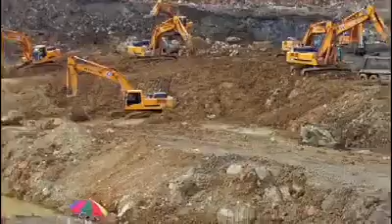But the Subic shipyard didn't have such an easy start. What made this project possible, despite such difficulties, was Hhic Phil's enthusiasm, which turned crises into opportunities.

Starting in May 2006, Hhic Phil completed the construction of a mega-scale shipyard on 304 hectares of land in merely 35 months. Prior to construction of the shipyard, Hhic Phil also won the bid for 12 container ships, writing a new chapter in the history of global shipbuilding.

Hhic Phil was also awarded a presidential award by the President of the Philippines in July 2008, the first time for Asia.

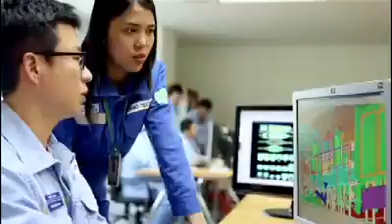The Subic shipyard serves as a mechanism for maximizing synergy in economic development for both Korea and the Philippines. It helped the Philippines become the fourth biggest shipbuilding country in the world, and it has contributed to creating over 20,000 new jobs, becoming a role model for our mutual growth.

The layout of the shipyard and production system, built according to a thorough design plan, is creating a new paradigm in the design of efficient global shipyards.

The world's largest dock, number 6, is 7 times the size of a soccer field and has a capacity of 450,000 tons per year. Dock number 5 also has a capacity of 250,000 tons. In addition, there is a 3.8-kilometer long quay as well as 4 giant Goliath cranes. It is a global-scale shipyard.

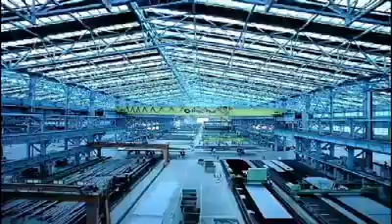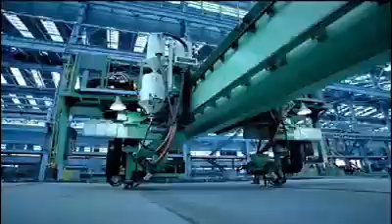The pre-treatment and cutting shop are arranged into 4 buildings and boasts state-of-the-art equipment including 21 plasma cutting machines and a 2,200-ton roll press. It has the capacity for pre-treatment and cutting of 500,000 tons annually.

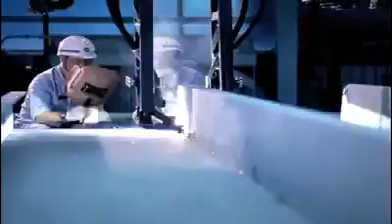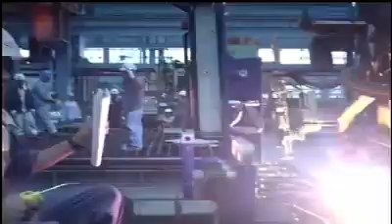At the 175,000 square meter assembly shop, individual blocks of the ship are manufactured in its own specific assembly shop. Then the blocks that span over 1,000 meters are welded together in merely 40 minutes using a high-performance and high-efficiency automated production line system. A large-scale moving shelter makes it possible to work indoors despite the frequent rainy weather in the Philippines, which greatly improves productivity.

The Subic shipyard boasts the ability to secure materials and supplies as well as state-of-the-art production equipment. The shipyard has a total of 9 ships, including 2 multi-purpose carriers, tugboats, and ro-ro vessels. Core materials and components are directly procured from Korea using these vessels, which helps with competitiveness in cost and quality.

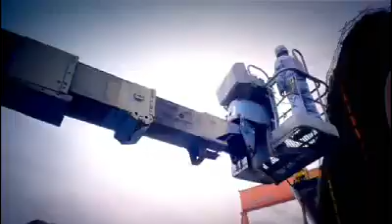The Subic shipyard, which has large-scale facilities and state-of-the-art equipment, built numerous vessels starting with a 4,300 TEU container vessel and a subsequent 6,600 TEU container vessel.

It also has the capacity to build all types of merchant ships, including 114,000 and 160,000 ton crude oil tankers, and 180,000 and 205,000 ton bulk carriers.

It also created the foundation for the offshore structures market by building a CALM buoy, which serves as the bridge between fixed platforms and shuttle tankers, and an 18,700 TLC floating dock for the production of caissons. It also has a portfolio of various offshore structures, including a near-shore barge to support offshore plants.

It is now focused on full-scale production of high-value-added vessels, including the VLCC, VLOC, tankers, QMAX LNG tankers, LPG tankers, drill ships, and the FPSO.

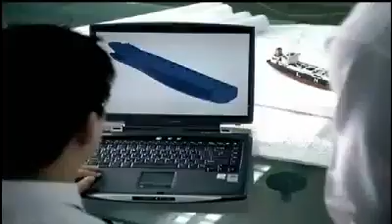With expertise gained from various projects, the shipbuilding industry is a technology-intensive industry that needs to respond to the increase in the size and speed of ships and the increased role of information technology. The competitive edge in terms of design and production is based on these three areas.

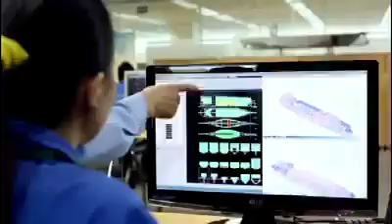Through close partnerships with Yeongdo Shipyard and the R&D Center, the Subic Shipyard constantly strives to improve the design of ships, develop digital shipyards, eco-friendly construction, and future-oriented R&D.

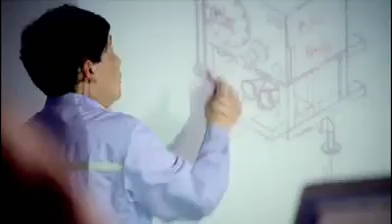It is involved in a variety of R&D efforts to create quality ships, including developing and validating various ship models, developing dust-proof design, and advanced automation systems.

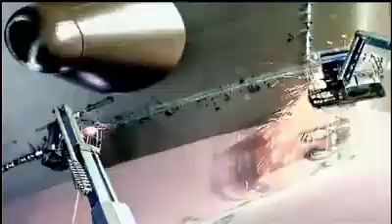Hhic Phil aspires to become the mecca of ship construction that brings customer satisfaction by securing the world's most powerful technologies.

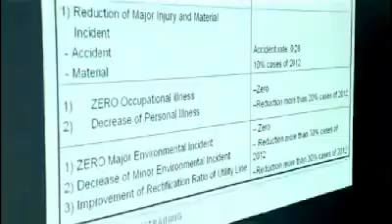A comprehensive safety and environmental system is the foundation for creating excellent ships. Under the motto Safety First, Hhic Phil is committed to 3Zero HSE policy.

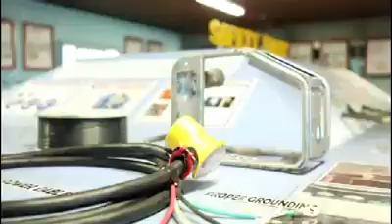Its Safety Education Center models the actual work site, allowing managers and plant workers to experience the work firsthand and understand the importance of safety management.

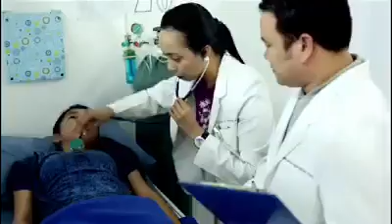There is a medical clinic on site with doctors and nurses to manage the health of the employees, as well as respond immediately to accidents. The clinic works closely with a nearby hospital to minimize the occurrence of diseases and injuries.

These measures helped acquire the OHSAS 18001 safety certification and ISO 14001 International Environmental Certification in 2009, equipping it with the appropriate international safety and environmental systems to carry out its projects.

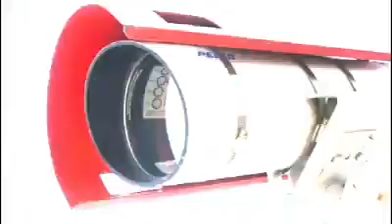As the shipbuilding industry developed into a technology-intensive industry, shipyard security became more important than ever. Hhic Phil's central control room quickly and accurately grasps happenings within the shipyard and takes a complete security stance when situations arise.

Strict access control, including a 3-level iron gate, a license plate number recognition system, an emergency access control device, an X-ray vehicle search device, and a biometrics access system, has been employed at the shipyard.

Hhic Phil also provides luxury apartment-style accommodations to enhance the quality of life for the ship owners. High-quality infrastructure, including an international school and hospital for children and families living in Subic, also contributes to a safe and reliable business environment.

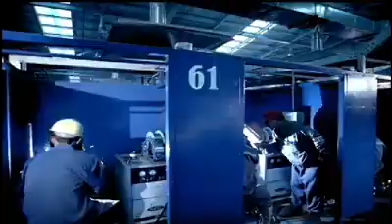Hhic Phil aspires to be a company for the people by engaging in a variety of social contribution efforts. One of the ways Hhic Phil contributes to local regional development is through its world-class 2,500-person capacity training center to train and develop a select group of local talents.

Hhic Phil also cares for the welfare of its employees. The company built a total of 1,000 employee housing units and offered them to employees for an affordable rate.

The company is also at the forefront of improving the quality of life for the local community by donating a variety of community facilities. In addition, Hhic Phil provides various medical services, including free health screenings and medicine for local residents without adequate medical care.

Hhic Phil will continue to do its best to make the world a better place for everyone by contributing to society.

We're preparing for the next century. Hhic Phil's Subic shipyard is creating a new paradigm for offshore plants through its world-class ships and technology.

Subic Shipyard will change the future of the shipbuilding industry, and that change begins now. Run to the new world. Hhic Phil Subic Shipyard.